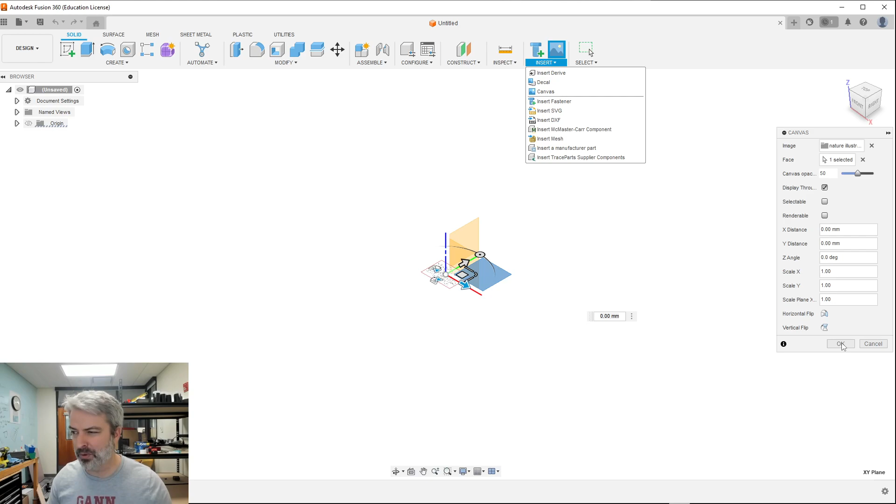So I'm going to import my canvas. I went to Insert, Canvas, and imported that in. I need to select which plane I want to put it on, so I'm just going to put it on the bottom. It doesn't really matter for this since we're only using one plane. We'll import it there, and I can look from the top to get a nice overview.

As I import it, it's just going to be whatever dimensions the picture is, which might not be so helpful. One thing I'm going to do is go up to Document Settings and change this to be in inches. If I click this and go over, it should pop up a dialog.

I want to do this in inches since that's maybe what we're most comfortable with, and we're going to do it in canvas. The biggest size of this should be about 8 by 10, approximately the proportions here. It just imports at whatever size it wanted to be, but we can go in and set this to be a specific length.

We're going to go into the canvas, right click on it, say calibrate, and select two points on here — there should be little crosshairs like this. We'll select two points, one and two, and then set this to be whatever size — right now it's like 0.69 inches, which isn't going to be good for our laser cutting. So we're going to set that to be 10 inches instead.

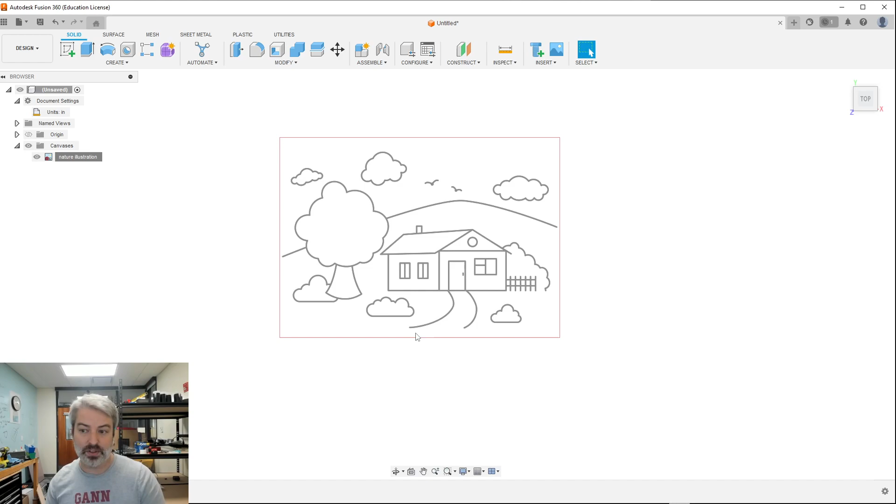It'll adjust everything else proportionally, keeping the ratio the same so you don't get any stretching — it just adjusts all the other sides to match that size. Now we have our canvas. This is something we commonly use in Fusion. For example, for technical drawings, if we have a drawing of an object we want to recreate, we can import it as a canvas, make the proportions correct, and then draw on top of it.

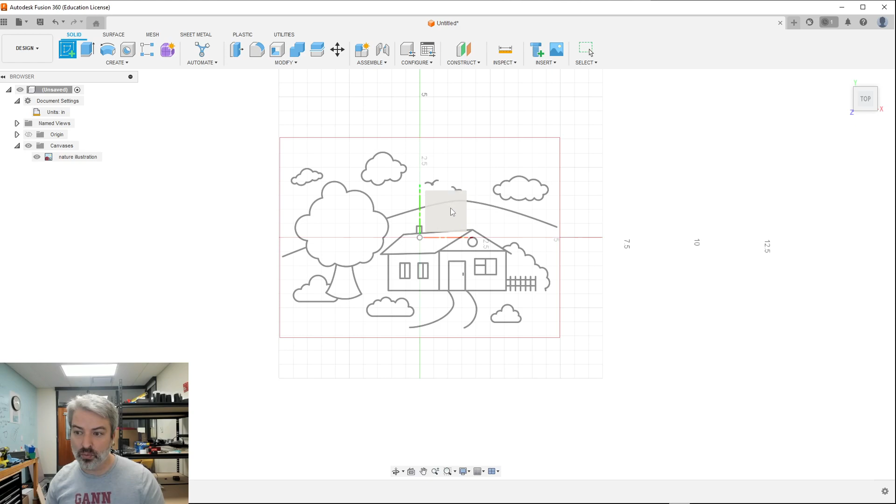So here we're just going to draw on top of this. We're going to create a sketch on top of this canvas by hitting Create Sketch, choosing the same plane as our canvas, and then start sketching in and covering up all of these pieces.

Let's see what I want to do in here. I'm probably not going to do the whole thing — I might, but I won't bore you with all that. I just want to get the major parts in here, the key things.

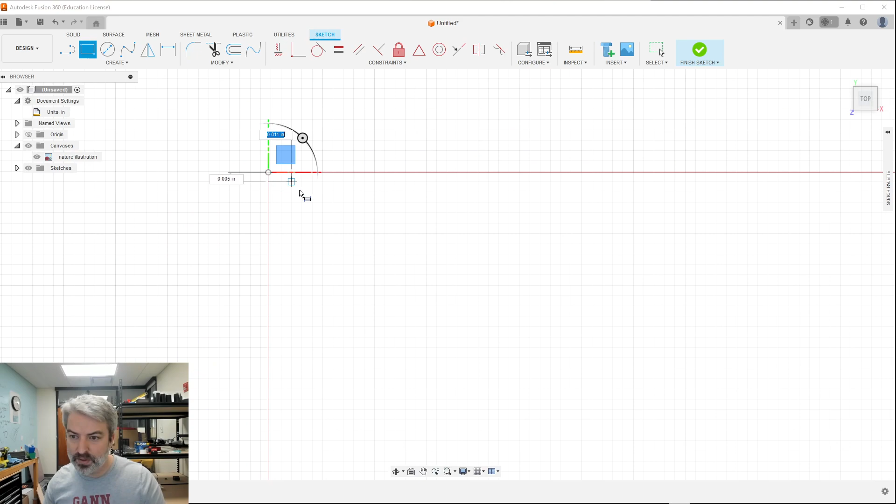I'm going to put in a little rectangle. It really wants to snap to a point, which is kind of annoying — I just want to get to this edge, but it keeps trying to snap to a point on the grid, which isn't so great. It doesn't have to perfectly match this, that's not my goal, but I'd like to get as close to these corners as I can just to make everything line up. I'm just going to zoom in a bit — that's good enough for me.

All right, we'll go back out. So we have the first thing in here.

Okay, one thing in our picture that's not good is that every shape on here should be fully contained. It should form a full shape, which means I should be able to trace the border of every object. For example, in this tree, all the bushy part of the tree is one contained object because I can trace its full outline. Same thing for the house, the roof, the border of the house, the windows - all that looks great, and I can recreate that exactly in my drawing.

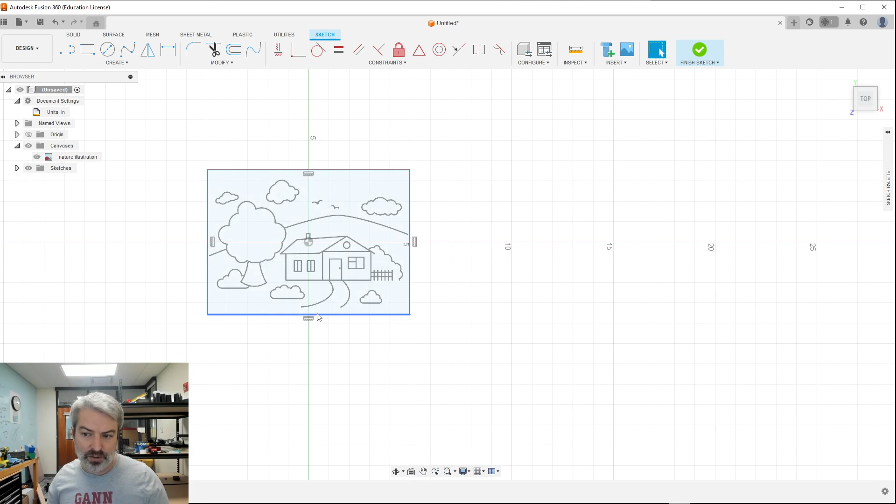But some things that are not good in here that I will have to work with are this driveway or walkway up to the house. It goes out, but then it just doesn't finish. So I either need a line to connect this to finish the shape and make a full outline, or I need to connect this to maybe the edge - that could also form my outline.

Similarly, this mountain or hill in the background doesn't quite go to the full edge, so I need to work on that too. Let's see some cool things I can do here - I just need to manage that. Same thing, this bush, I need to figure out what I'm going to do with the fence. These should all be individual pieces, so I don't have to feel like I need to be exactly the same as the picture, but it can be a good starting point for me.

I'll just do some basic shapes. Let's get started. I can go over to rectangle, or I can access this using just the R button for rectangle. I'm going to hit R. I can click 2 points, and that will form a side.

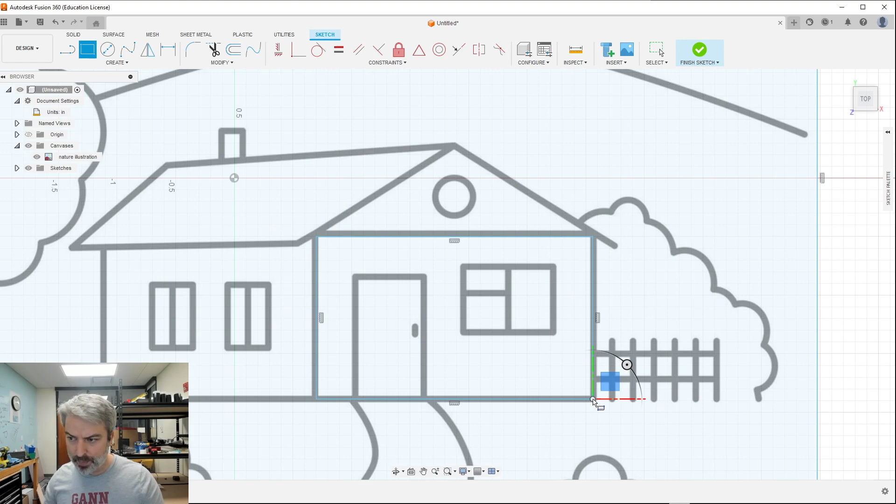Actually, maybe I want to do this a different way. I think I want to do the big parts of the house first - I'm going to do this big front wall. You can skip forward here if you're already past this step, but there are some key things I'm going to try and do. So I'm going to make this wall, and I'm going to make this next wall.

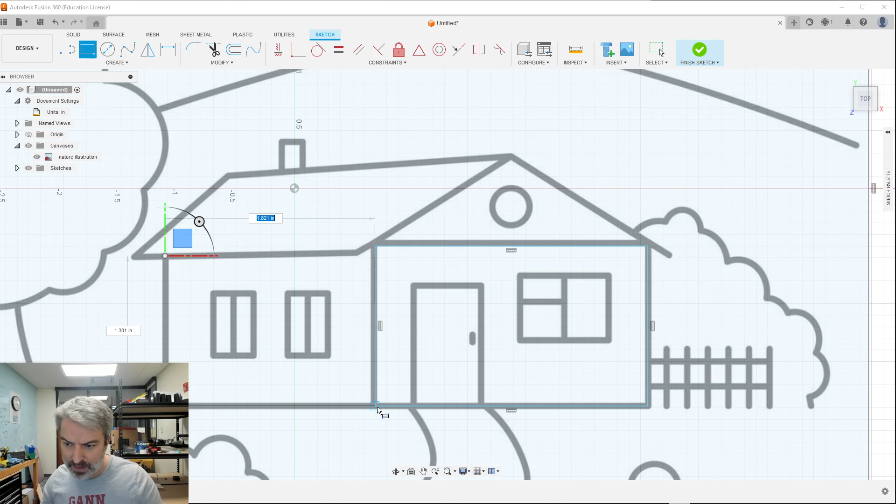I need to make sure that these two things connect. Ooh, it's kind of not quite a rectangle, but I think I can get pretty close. Let's do this - I'm going to do a rectangle like this. I can do my first kind of fancy move here. I'm going to click here, click here, and click down at the bottom. Actually, I'm going to click a little bit off.

I'll show a tool that we can use here. So I got my rectangle, but it's not quite lining up with each other. So if I want to make sure this line and this line are kind of the same line, I can go in here and start doing some constraints.

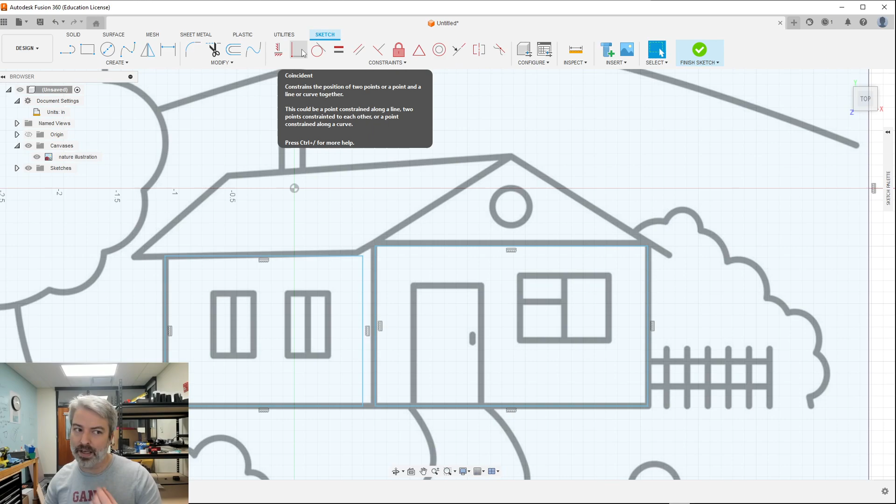Constraints are things where we can say, make these two things happen. For example, a very common one we'll use is coincident, which is going to make 2 points, or a point and a line, match up together. So here, I want to make sure these two points be exactly the same point, because that's going to bring the edge of my rectangle over.

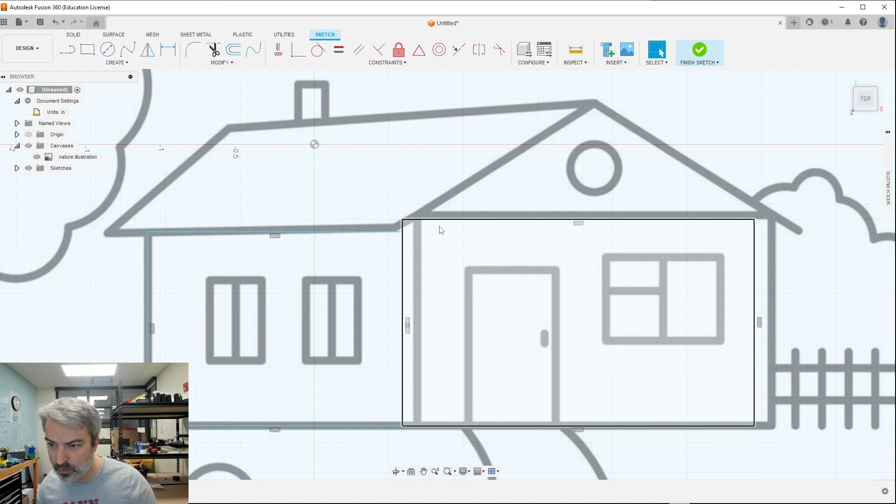So if I go over here in coincident and I select this circle, this point, and this point - ooh, it moved over a little bit, not exactly the way I wanted. It shifted this whole rectangle. It's like, yes, I can do that. Let's shift this whole thing over a little bit more. I'm going to shift that out.

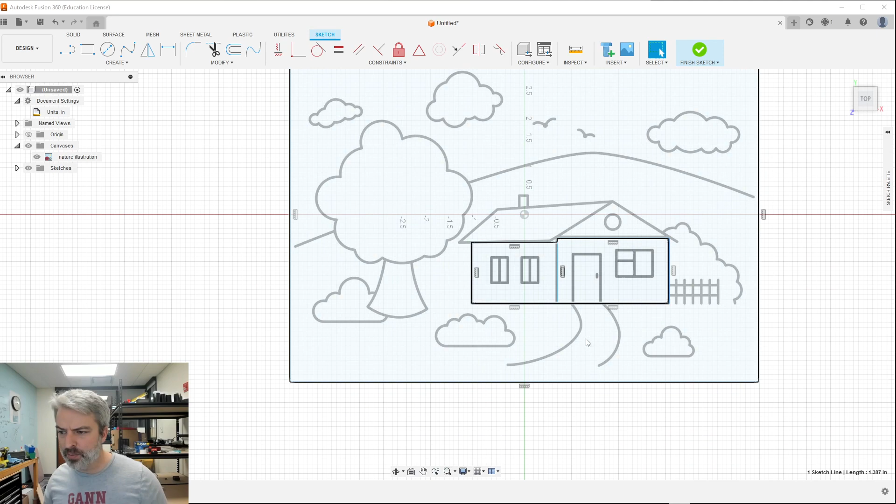Ideally, I might get this thing to be fixed to maybe the origin to begin with, so everything's based on the origin, but I'm not going to worry about this too much. All right, I do have one little thing - I don't like the way this is not exactly a rectangle, we have this little line over here. So this is the first little technique I'm going to do - I'm going to add in a line.

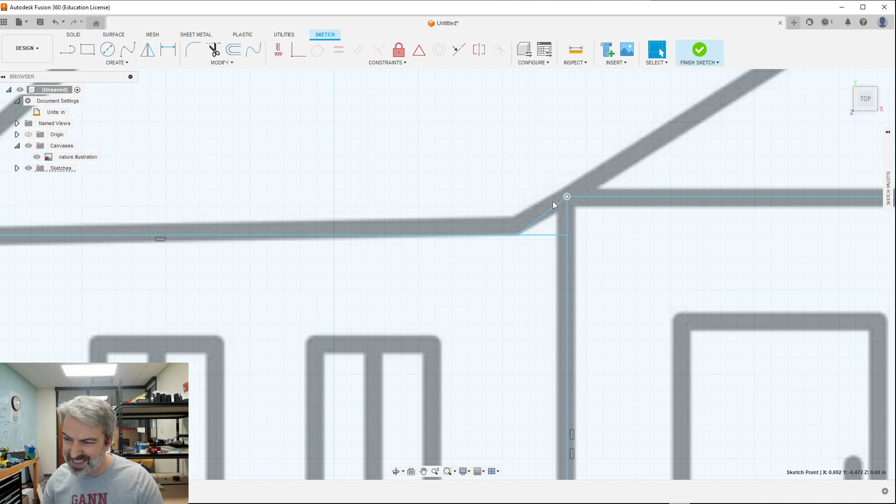I can just say L for a line, and click this corner down to here. I'm not going to try to exactly match this. I could move this thing up a little bit. This has very thick lines, and mine's not a thick line, it's a very precise line. So I could try to put this in the center, and then I really don't need this section of my full line anymore.

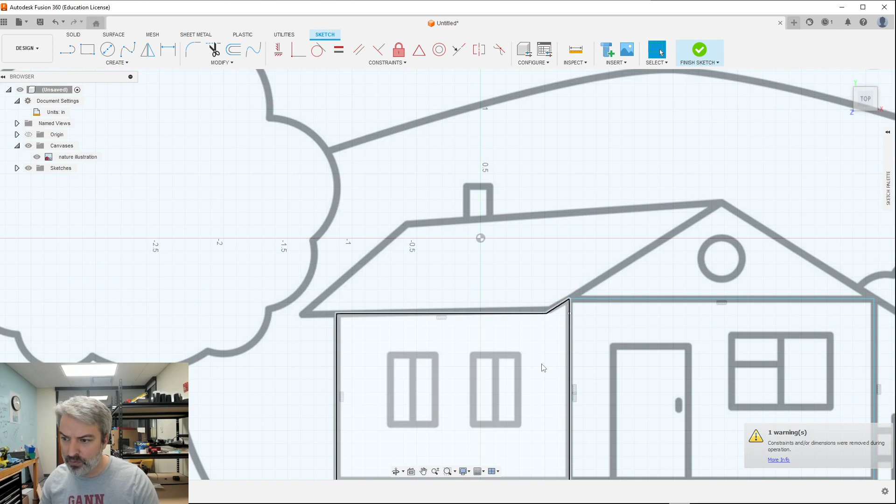This is a really important tool we can use: the trim tool. If we hit T on our keyboard, or cut with these little scissors, we can cut off a little bit of that. Great. Now we can see these two shapes are fully contained. I can tell because when I click on them, it's a full shape, just the part I want.

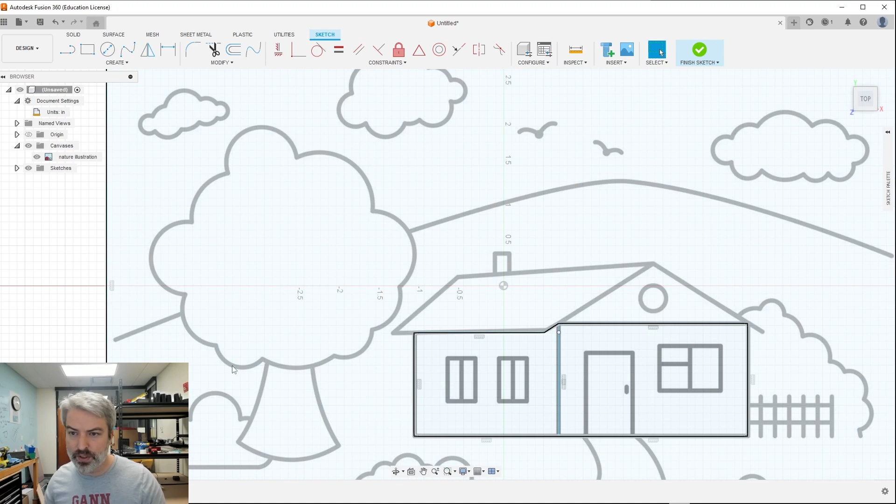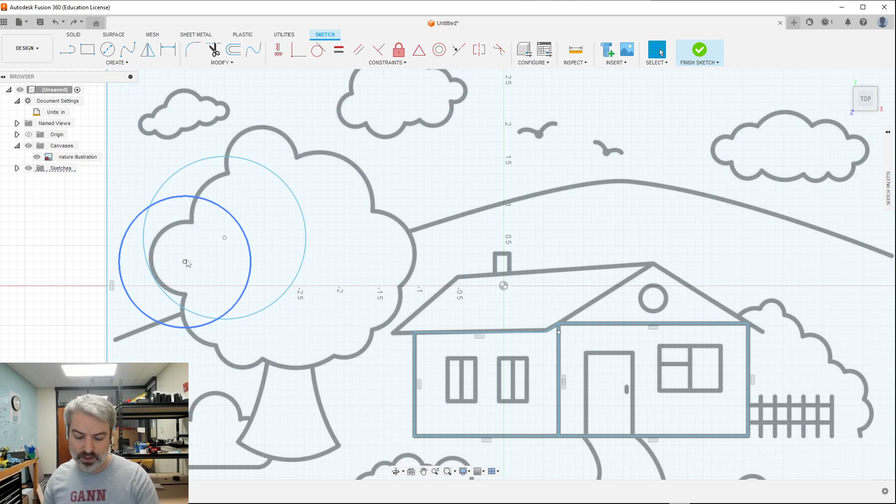I want to show one more tool before I pause and skip ahead. There are a couple cool things I can do with a circle, like this bushy circle technique, and I'll do the same for the clouds. I can create some circles - if I create 2 circles, I can hit the trim button to cut out parts and get that kind of bumpy, cloudy, tree-like shape. Draw 2 circles, then hit trim. That's going to be really helpful for drawing everything on my tree.

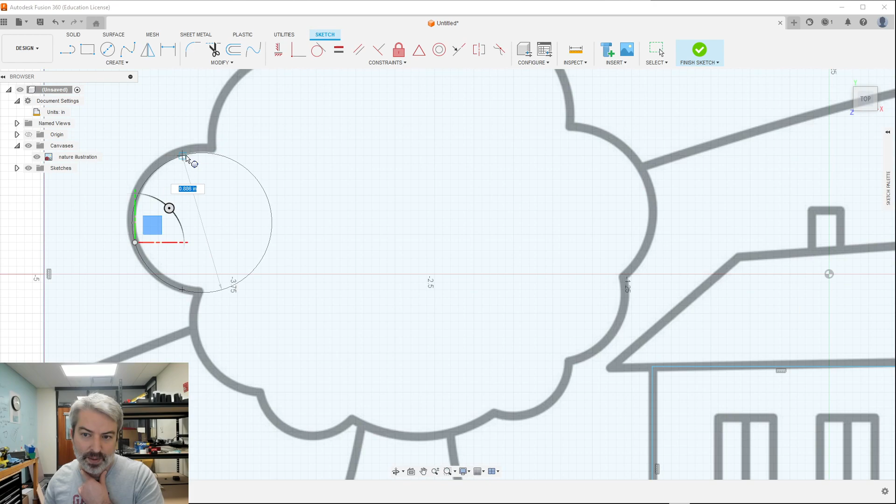Another thing I can do when making my circle: if I go into 3-point circle, that defines a circle based on 3 points. So if I click 3 positions, it'll make a circle that exactly matches the one in there. I can repeat this process a few more times - click, click, click, click, click, click - and start to see the outline of this.

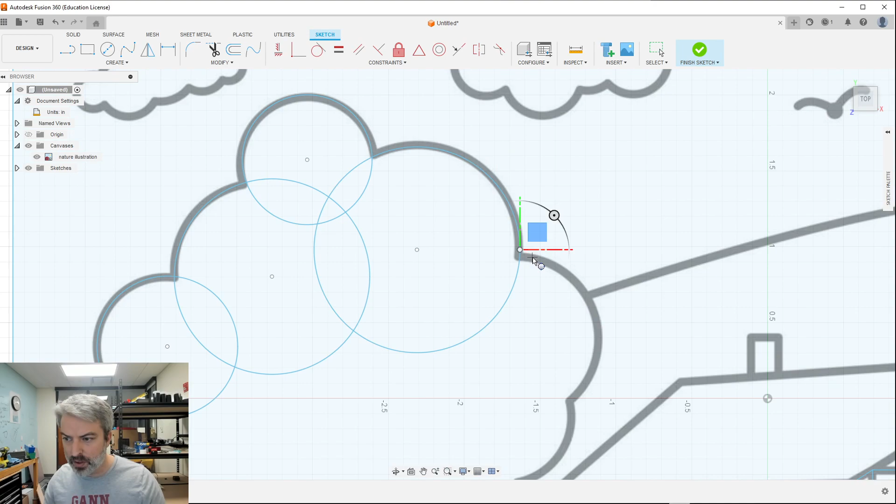Let me finish this up, go through my trim, and that'll be the end of this part of my diagramming. I might not even do the full diagram, just get as much as we need in here. Let me pause this while I do this.

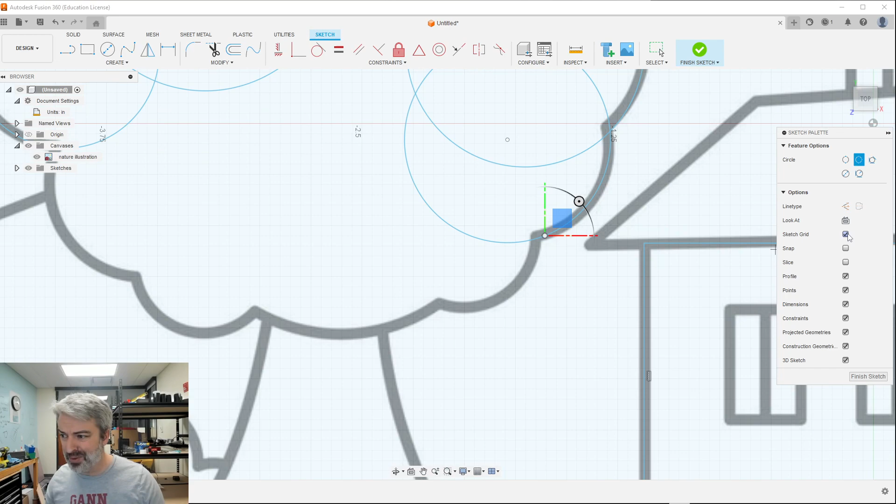One thing I'm going to do, because it's annoying me, is go into my sketch palette on the right side and take off snap, so it should no longer snap to the grid. I think I even want to take off my sketch grid because I don't care about the grid for this one. Similarly, there are some constraints showing up - I typically want to see what constraints are in a real engineering design, but in this case I don't care that much. So I can click off those constraints for now, which will hide some annoying features that are super useful for an actual design but not so much for this. All right, I'm going to pause this.

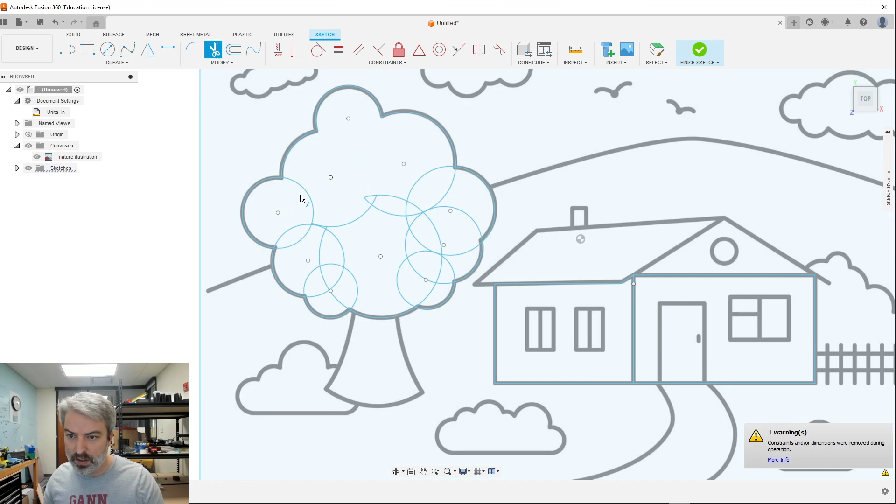All right, so I have my full circle, I have all the circles done for this tree. I'm going to go into my trim tool - I can just hit T, remember, some shortcuts make your life easier - and cut out all the rest of these parts. I have my beautiful tree left over. I'm going to do one last thing here, and I'll pause it while I finish everything else up. Again, I probably won't do the full thing, just to save myself some time.

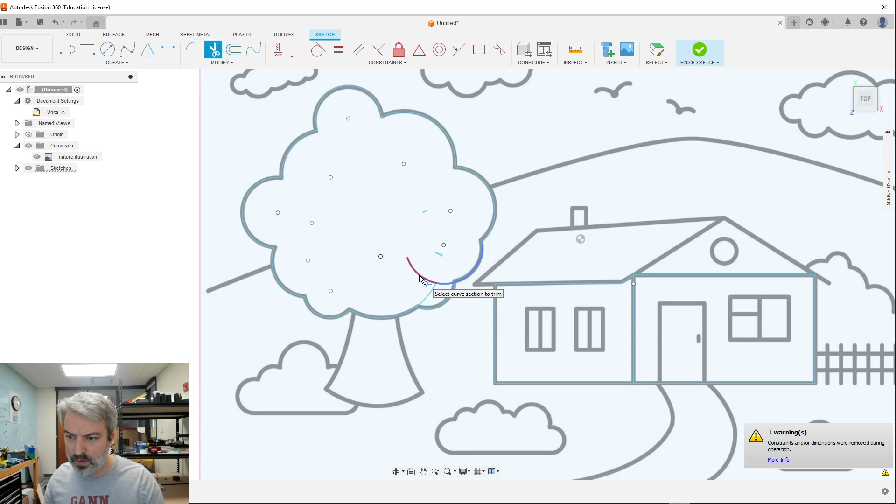But trim all that off. Okay, now I have my tree. Let me trim that little bit here, that little bit. If there's any other little bits remaining in here, this can be kind of annoying, so we don't get all this stuff showing up in our laser cut. We really don't want that. Anything left in here? There should just be the centers of the circles left, so I'm looking for any other little things that are not the center of what I know would be a circle. All right, so we have that in there.

Great, I have the first tree. I should maybe check in and see how my progress is going. In order to do that, I can turn off the canvas. If I click this button, the canvas will disappear, and I'll just see what's left of my work. So I can see I must have destroyed something in here because I'm missing part of that tree. I should really finish that up.

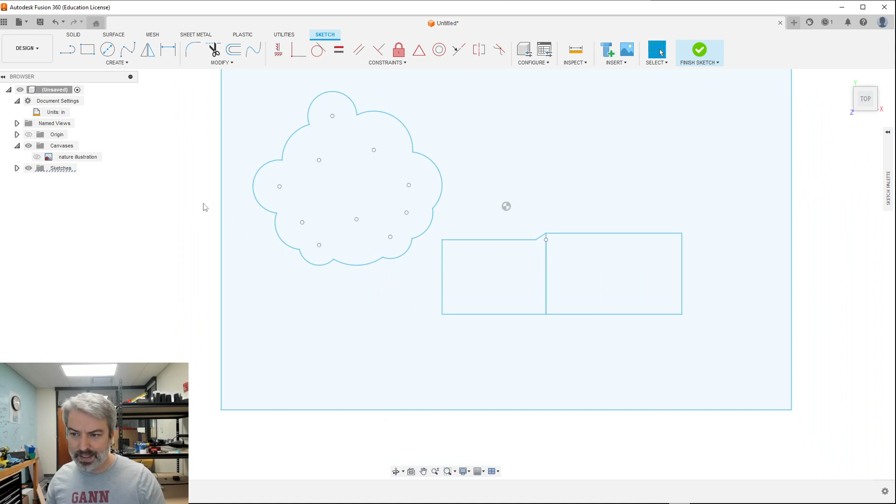All right, added in a quick sketch, and I got that last part in. So I'm going to go ahead and get as much of this design in. I might not do everything, but I'll get as much of the design in as I can. Let's see, I'm going to check over here. Is everything good? I'm worried a little bit about this little dot here. I guess that's okay, that's just kind of part of this line. Yeah, so we should be doing good so far. All right, hopefully come back and we'll have all this done.

All right, so at this point I got most of this done. If we get rid of the sketch, I have that and I have that. Oh, I didn't really get rid of that, let me trim out some of the stuff in here. I thought I just did that. I'm still not saved. Trim out all this stuff in here.

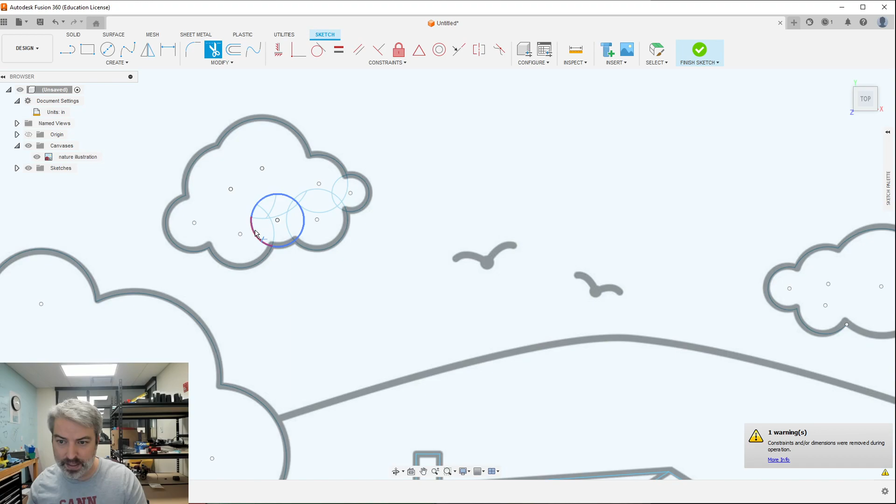I do want to do one last thing before, just to highlight the last bit of the sketching. Also, as I'm doing this trimming, I think it's helpful to pay attention to the details because some of these things can be really small. Little elements like that can be easy to skip over, so really gotta be careful about getting everything in here.

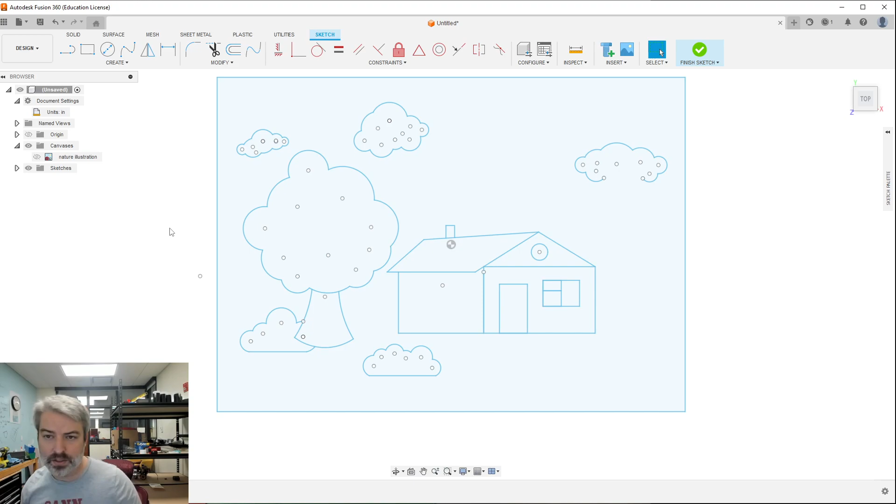And then, okay, we should be good there. All right, so now if I get rid of my canvas, I should have this full thing on here. All right, now one thing I did want to highlight, as I mentioned, was I have this kind of sweep of a hill in the background, and I want to capture that. It's also not great to use a circle for this because it's not quite like that. I can try and use a fit point spline, and also I want to make sure this goes all the way to the end here.

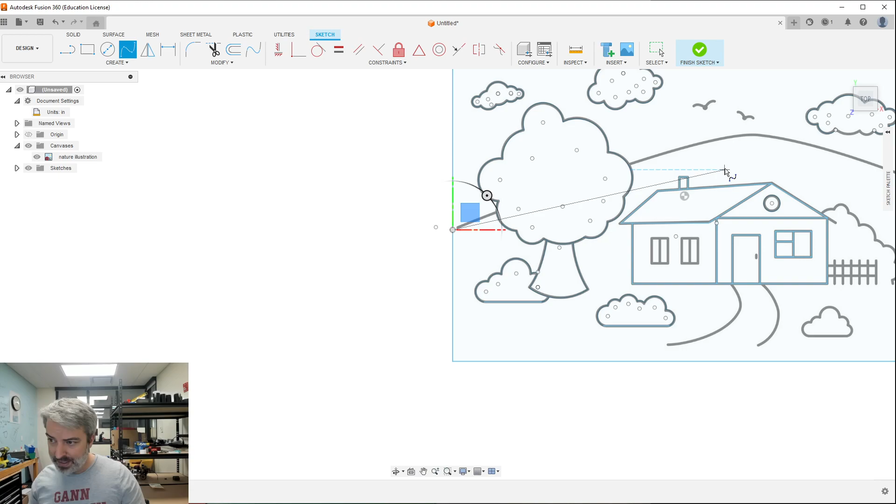So a spline is more or less like a curved line that we can make. I'm going to select these two points and then I can kind of curve this. Well, let's see. I wonder if I shouldn't do my spline maybe a little bit lower. I think there's a little bit of artistry in there. Well, I could probably also just move some of these points later. Make it something like that. Oh, fit point spline, there, there. Maybe something like that should be good.

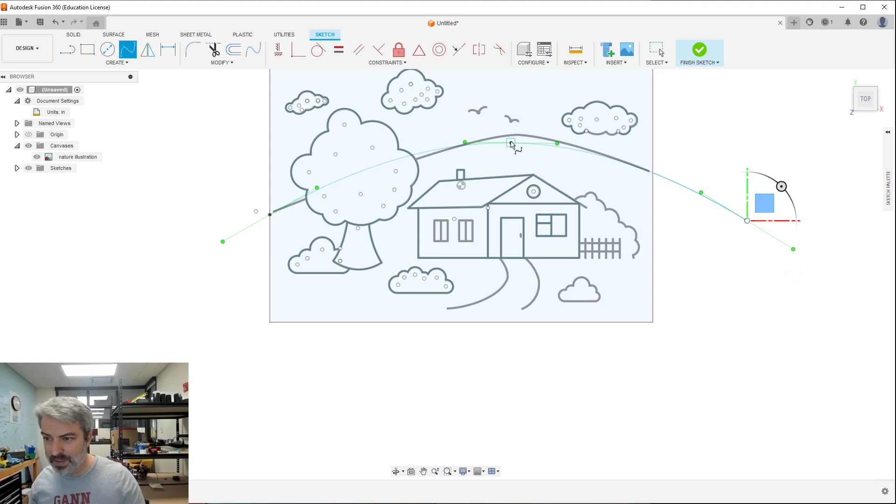And I think I can grab some of these points and drag them around a little bit to make this a little more approximate to what I want. So I think something like that looks pretty good. And then I could probably take this point, pull it up here. Now I do want to, okay, so now that should be close to good. All right, so that's pretty good.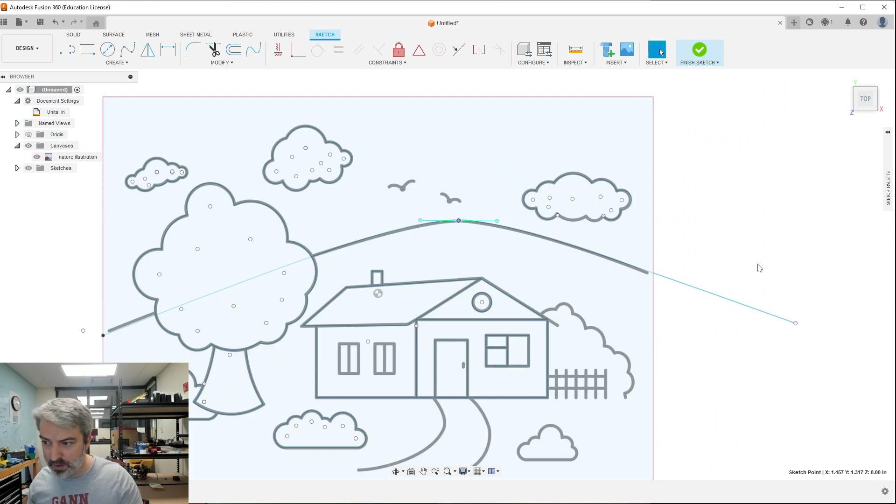And then we can go in here and trim any of the excess pieces. So I don't need this little piece on here, and I don't need this, I think this is part of the spline. So let's see how that worked out, see if that worked for us. I do have this whole thing in here. I do want to get rid of this part of the spline as well. Hopefully it'll be friendly about me doing that. That looks pretty good, it's going to get that whole spline in here.

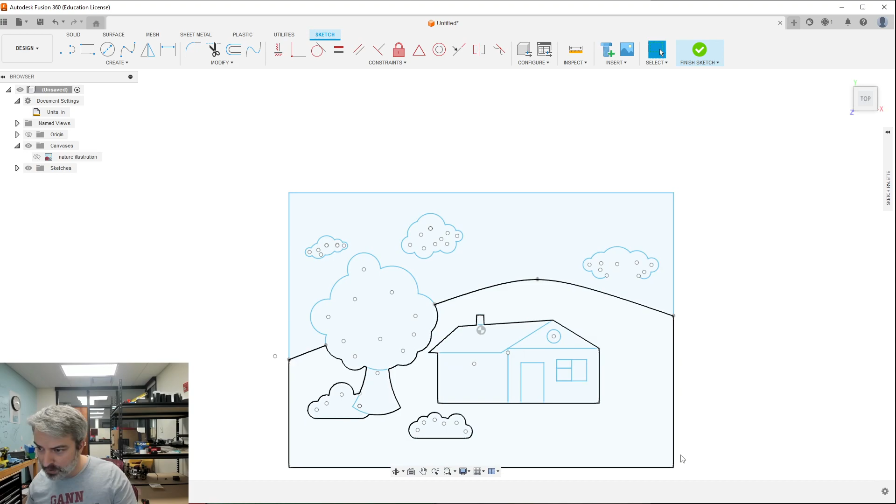If I get rid of the image, it might be clearer. Yeah, good, we have these full things. I want to make sure of this. Okay, it's looking like it might be two points over there, but it's just a single one. All right, so we're pretty good in here, we have this all done. Okay, I'm gonna, well, I guess I'll keep on with this video.